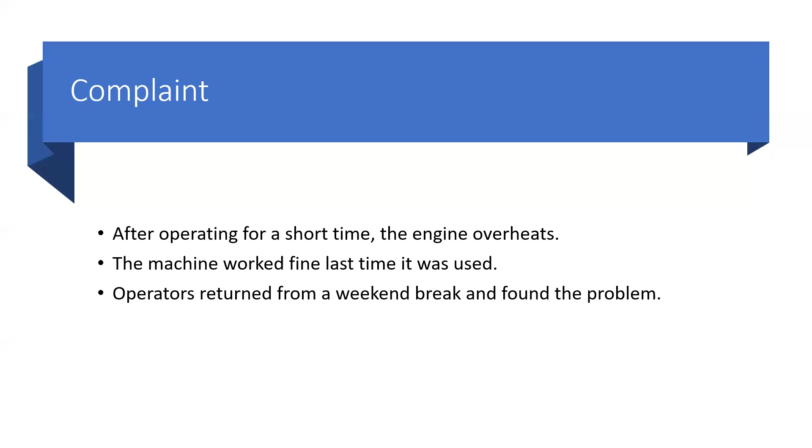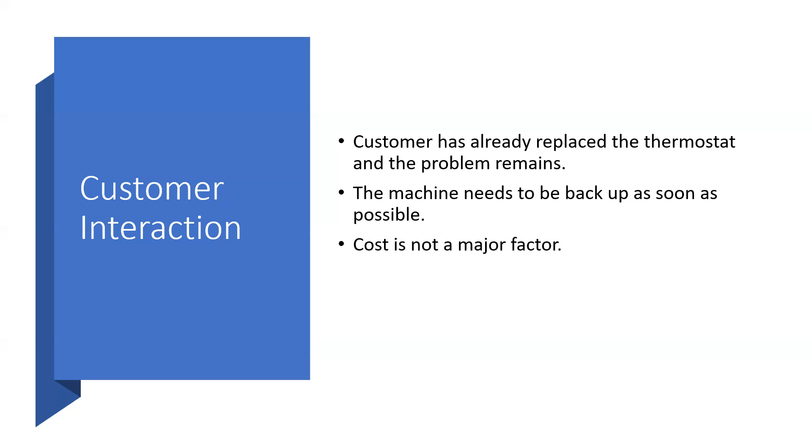So after speaking with the customer, they said that they had already replaced the thermostat in an attempt to just try and get a quick fix so that they could get their machine back up and running. But they said that even after replacing the thermostat, the problem is still there and it's still overheating just like it used to. They said that they need the machine back up and running as soon as possible. They also mentioned that cost is not a major factor when it comes to repairing this machine.

So after speaking with the customer, I proposed that we take the machine and have it shipped to the shop. And then from there, once it reaches the shop, different tests will be performed on the cooling system to determine what's wrong.

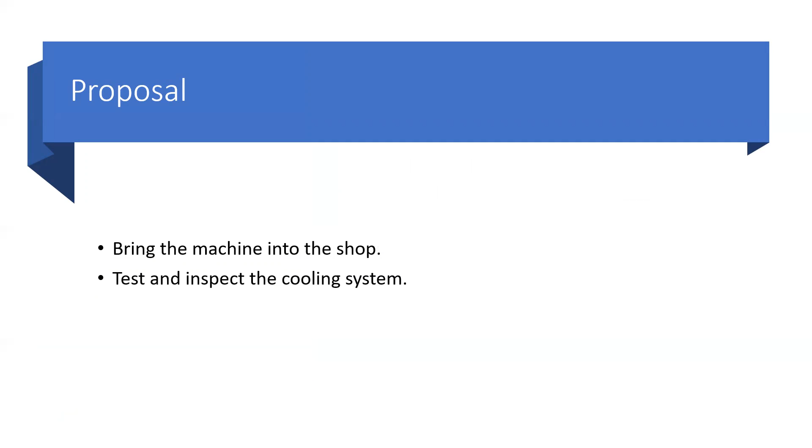So the complete timeline for the machine is as follows. Initially, when the machine gets into the shop, obviously check all your fluids. Check your coolant, of course, is the most important, but also check engine oil, make sure that there's no oil in the coolant, no coolant in the oil. That will raise a number of problems from there.

And then also tracking the machine around to make sure that the operators aren't just doing something wrong, that it is overheating, and that there is actually a problem with the cooling system. From there, I'm going to use a thermal imager to read the different parts of the cooling system, try and see where heat isn't being exchanged, where heat might be building up.

After going through the entire machine, it is seen that the radiator is not properly exchanging heat and that there are hot spots in the radiator. From the thermal image, it looks like the radiator is blocked. So from there, we're going to unhook everything and start to flush the cooling system and flush the radiator itself. After flushing it, found debris, a little bit of dirt, and a couple handfuls of smaller stones.

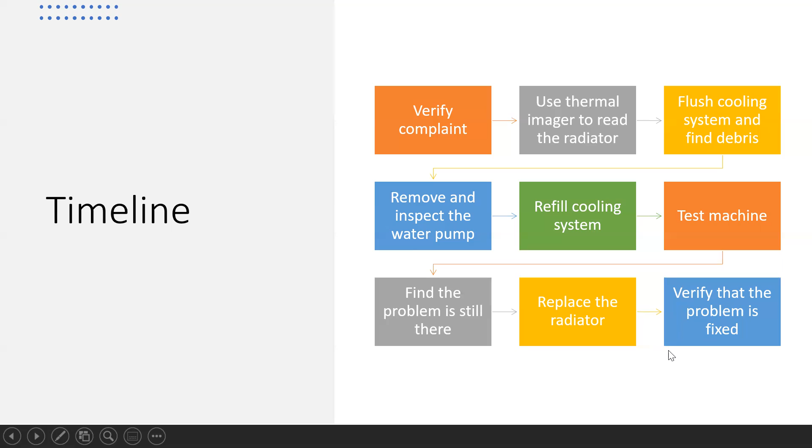So the special tool that was used for this testing was a Fluke TI-10 9Hz thermal imager. Like I said, the thermal imager was used to scan multiple parts, and then we finally ended up at the radiator to see that the radiator is blocked and that coolant flow is not going through at 100%.

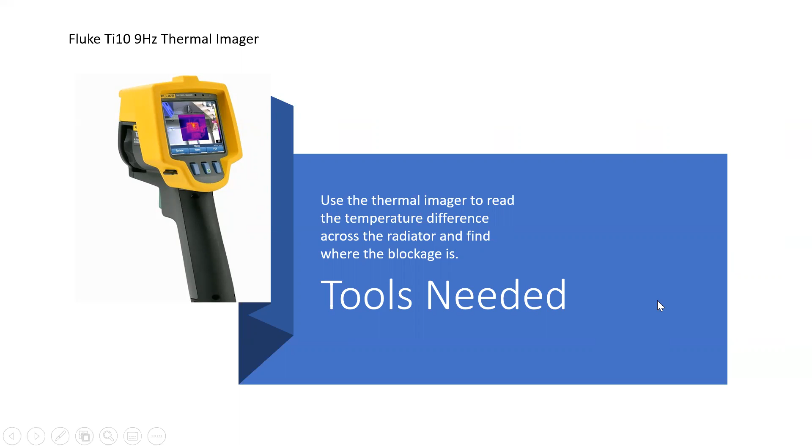So like I said, the cause: vandals poured dirt and stones into the radiator, and the stones then went through the radiator and lodged themselves into the cooling passages, which keep the coolant from flowing through.

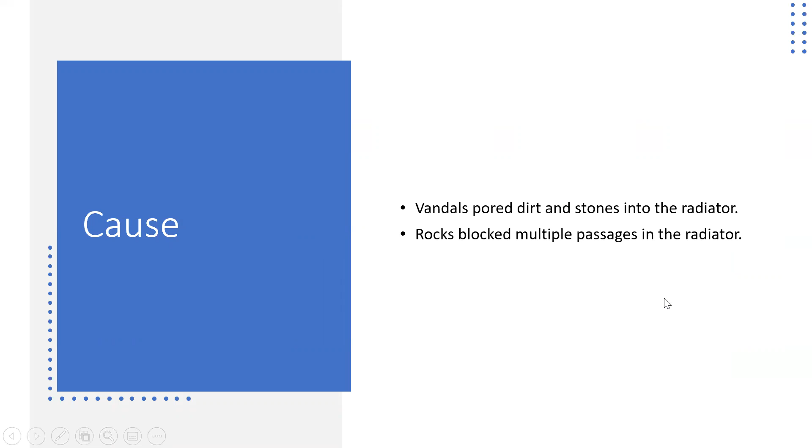All right, so to correct the issue, like I said, the cooling system is flushed and then debris is found. We inspected the water pump and no damage was found, so the water pump could be reused. Then the cooling system is reassembled once more and it still didn't operate like it should. And then the radiator is removed and replaced with a brand new one, and then the machine works as it should.

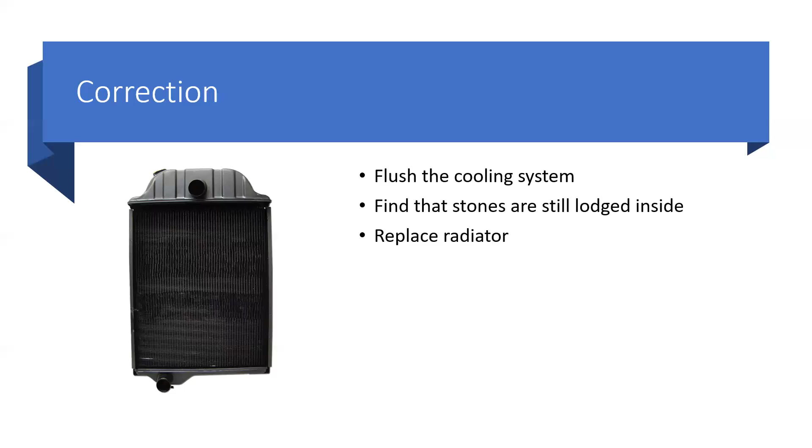So after the machine is tested, flushed, tested again, and a new radiator installed and then tested once more, the total labor comes out to 1 hour in diagnosing and recreating the problem and checking your fluid levels and such. 3 hours into initially removing the cooling lines and flushing the whole system and making sure that everything's out, and then hooking everything back up and testing again. And then 2 hours go into pulling the old radiator out, putting a new one in and refilling the cooling system.

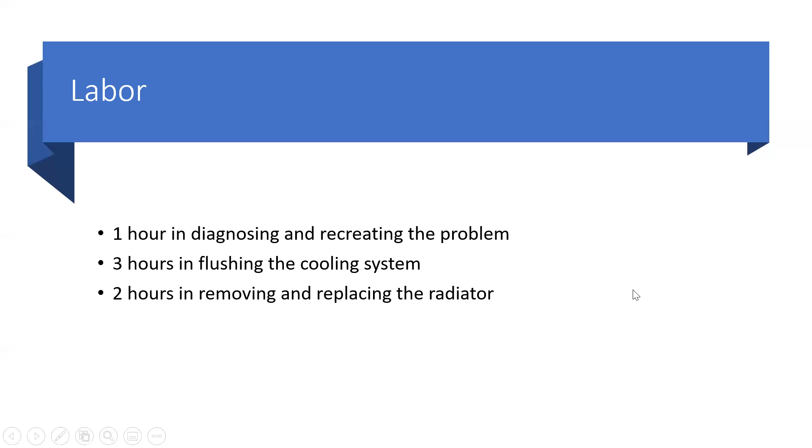Okay, so finally for cost, with this being a simple, straightforward job that only needed one man to work on, didn't need any help. The total cost comes out to $1,260. $660 on 6 hours of labor, $140 spent on 10 gallons of coolant, and then finally $460 spent on a new radiator.

Once the machine was shipped back out to the customer and a follow-up conversation was had with the customer, the customer said that they might know who the vandals were, that a few operators had to be let go in the last month due to them either messing up or just not doing what they're supposed to and costing the company more money than they were making them. So they were let go, and this could possibly be an act of revenge, and those operators will now be questioned.